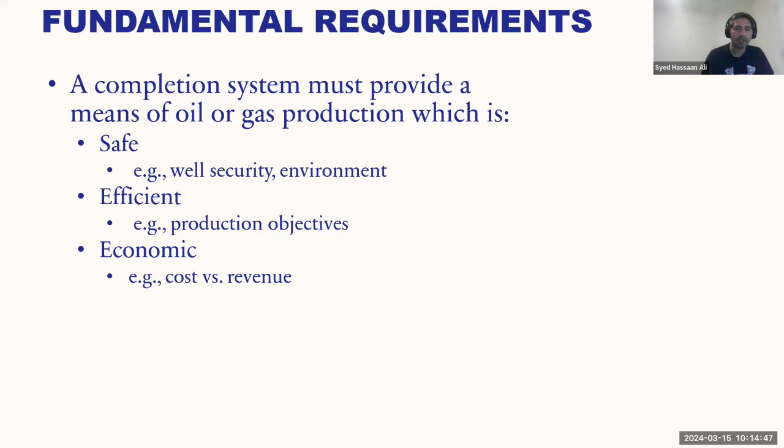Completions: history and evolution. It's not a very new technology, but it has evolved dramatically in the last century.

The first wells were dug in the Caspian Sea—these were shallow wells, and that's where the first completion was deployed. But the major advancements actually happened in the early 1900s, where the first gas lift devices were invented.

The first dual completion happened. The ESP was invented in 1926, and all of these technologies resulted in us producing more effectively and efficiently from these wells.

We could now dig deeper. We could now complete these wells deeper, and with the advent of artificial lift technologies in completion design, these wells that were drilled could produce for a longer period of time.

So it was more efficient and economical to produce from those wells which were previously deemed uneconomical.

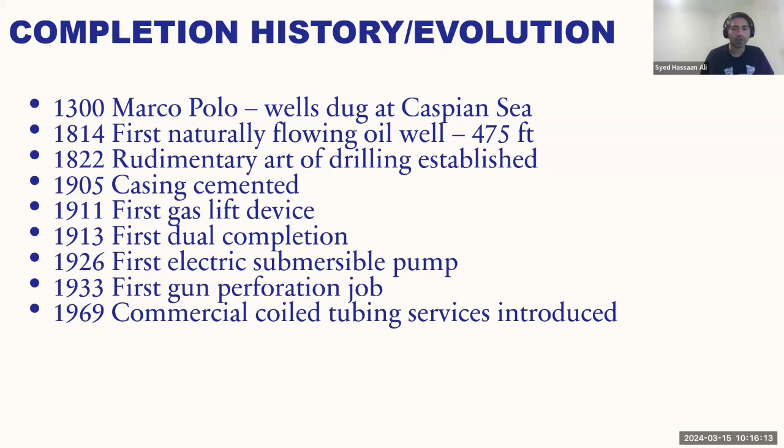And then finally in 1969, when commercial coil tubing services were introduced, that's where a huge boom in the oil and gas industry was experienced.

So the factors affecting well performance—there are three things that actually affect well performance.

The first and foremost is the reservoir boundary. This is usually estimated during the appraisal stage, in which appraisal wells are drilled and geoseismic studies are conducted, so that you can determine the reservoir boundary—how deep the reservoir is, how extended it is, and what its different boundaries are. Reservoir properties such as how much oil, gas, or water is present can also be estimated.

How much H2S is downhole can be measured, but the only thing that can actually be controlled is your completion design. So since completion is the only area which can be controlled, there is an obvious need for the completion design and installation process to be carefully conducted.

This can be explained through this flow versus time graph. This is a very simple graph, but most oil wells or reservoirs will follow this kind of pattern, where you have a very high flow rate initially when the well is drilled and completed and producing, just because there is so much reservoir pressure pushing that fluid to the surface.

But over time, as you start depleting your reservoir, the flow will go down, the pressure of the reservoir will go down, and now you have to make sure that your completion design is suitable for that entire time period, all the way from well completion to well abandonment.

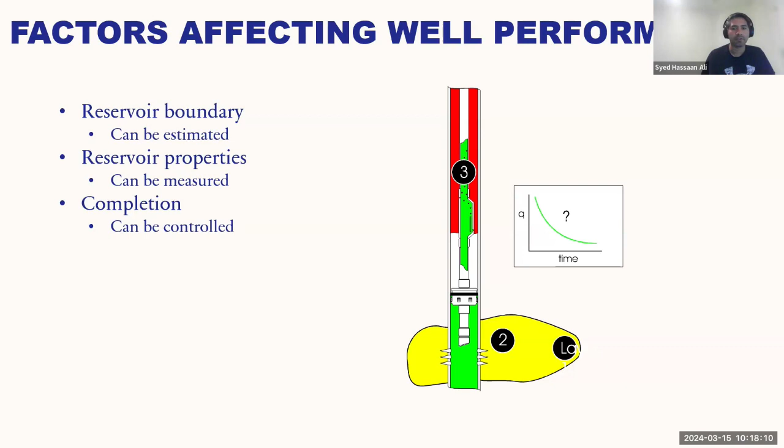In our previous lecture, we talked about the base rock and cap rock. I'm not going to go into a lot of detail, but just a quick recap: cap rock is essentially a non-permeable rock.

This is the rock that will prevent the migration of oil and gas into a reservoir which is higher than the cap rock. So effectively, what you want to do is have your completion deployed all the way through the cap rock into the base reservoir, or your producing reservoir.

And you want to make sure that all your perforations, your zones, are actually perforated in your base reservoir. And there are different types of completion designs.

The one on the left-hand side is a very simple straight vertical well, drilled with no multilaterals, no deviated wells, no horizontal well, just simple completions. This is how they used to do it early on, from the early 1900s all the way to the 1950s and 60s.

They would deploy a rig, drill straight down, and produce from the reservoir. That's it. But it had a lot of limitations, and one of the first is that once you have depleted that zone or the reservoir, you have to drill more wells just to produce from the reservoir.

Now the technology has evolved to a point where you don't have to drill vertically. You can drill what we call a horizontal well. Effectively, you come straight down, then reach a kickoff point where you start drilling horizontally. Now you can drill one well through the entire length of the reservoir and deplete it completely—not completely, but to a large extent.

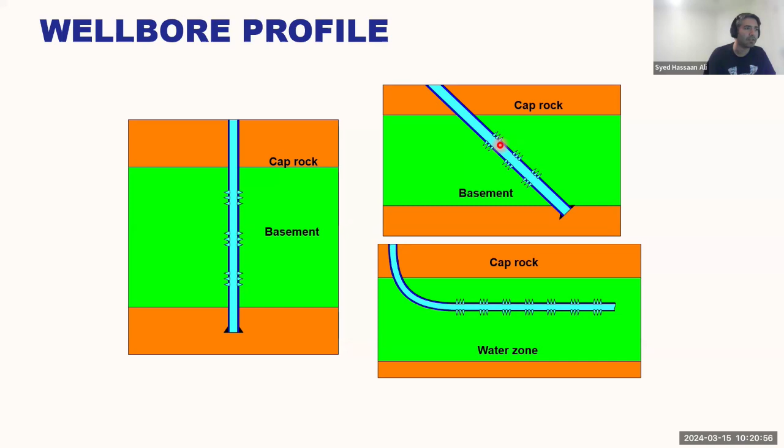There are a couple of functions of completions, the first and foremost being protecting the casing. You have a casing and then a tubing. The casing is there while you are drilling the well, deployed until the well is completely drilled. Once that's done and you move to the completion stage, you deploy the tubing.

Effectively, with your whole completion design, you are trying to make sure you protect your casing. Number one, we don't want it to erode, because behind the casing there is cement acting as a barrier between the formation and the casing. You don't want to erode your casing, because it can result in a lot of other problems.

You also don't want it to be corroded. A lot of times we use a lower grade of steel in the casing, so we want to make sure there's no contact of the formation fluid with the casing, because it can result in corrosion and erosion.

Tubing string removal is the second most important part of completion—you want to remove your tubing string whenever you have a requirement for a workover. Sometimes you do workovers for additional perforations, to clean the well, for snubbing, coil tubing operations, milling operations, or to remove artificial lift. So you want your tubing string design to be removable and modular, suited to replacement or workover—plus safety and contingency.

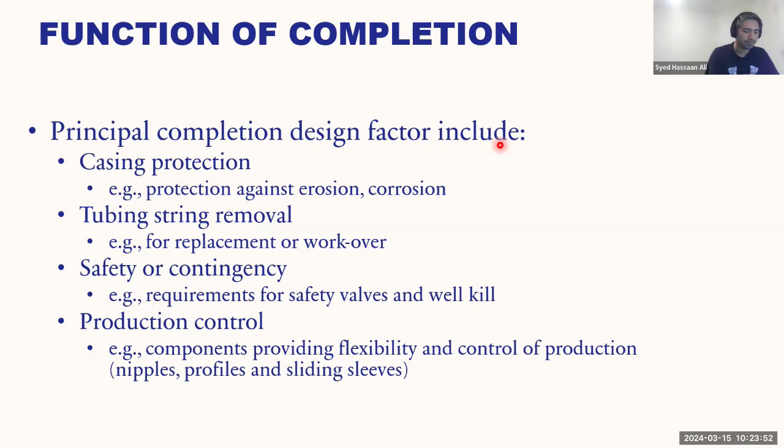There are two types of basic completions. One is called open hole completion and one is called cased hole completion.

The difference is simple. In open hole completion, you drill the well, deploy your casing, and then cement it. Below the casing, there is just a big open hole, which is not secured by any liner or production casing. It's just open.

What results is that it can actually result in an unimpeded flow into the borehole from the reservoir, but it can also result in other complexities. For example, your hole can actually cave in and it will reduce your production.

So gravel pack completions, although not very common, are still kicking around. You have to be cognizant that there is something called a gravel pack completion.

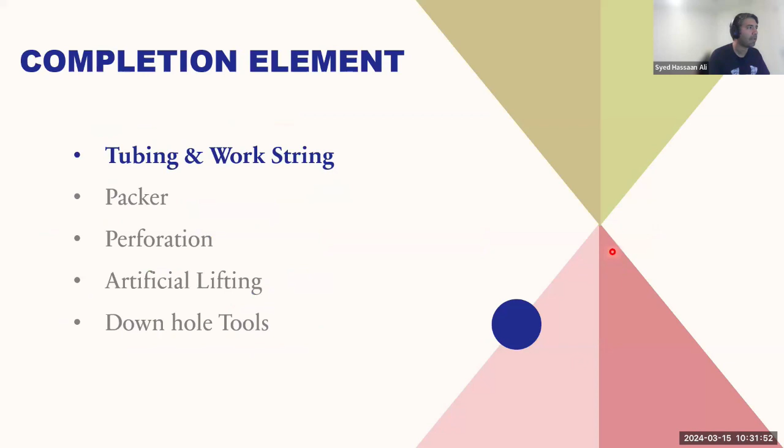So completion elements - one of the first completion elements we talk about quite a lot is your tubing and your drill pipe. Tubing is just a piece of tube made from specialty alloys. What you want to do is select the grade of the alloy to match the reservoir characteristics and the depth of the well, because alloys with a higher grade, higher yield strength, and higher tensile strength can be deployed in deeper wells, while alloys with lower yield strength can be deployed in shallower wells.

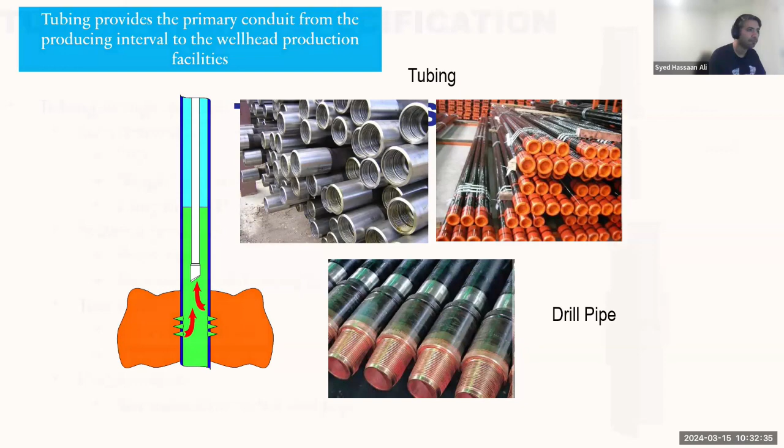Tubing string specifications: tubing generally provides the primary conduit from the producing interval to the wellhead production facilities - that means from your pay zone all the way to the top side. Therefore, proper selection, design, and installation of the tubing is very important as part of the completion system.

The size and dimensions of the tubing must be sized to enable efficient production. That means you want to maximize the size of the tubing. You don't want a very small tubing size because it will constrain your production due to the smaller ID of the tubing. So it should be selected to have efficient production.

The grade of the material - as I mentioned earlier, the string should be designed to prevent failure from tensile forces. There are a lot of forces in place, especially when you deploy a packer downhole: internal pressure, external pressure, tensile forces, compressive forces, and sometimes a combination of forces. So you want to make sure that, taking into account the corrosive nature of the wellbore environment, you select your material grade effectively.

And assembly of the components in a way that the string must be installed so that you can deploy all the components undamaged.

That means you can deploy your safety valve and your packer in a manner that will not let any damage happen to them, because they actually are there as a barrier. They're used as a primary barrier sometimes.

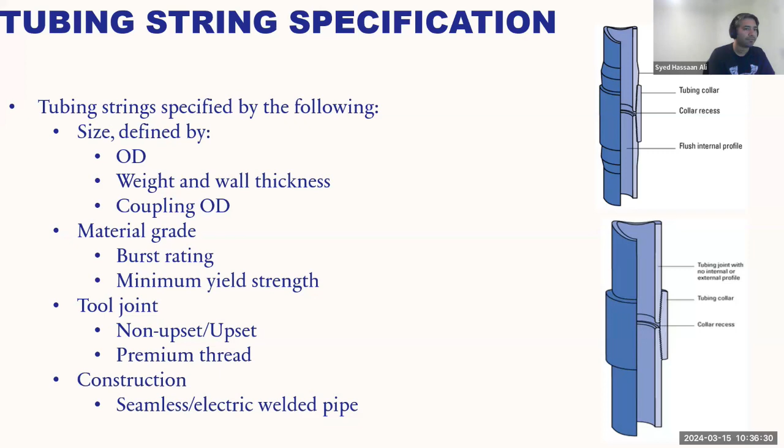So, string design factors - there are a few things I will briefly touch upon. We already talked about the production rate. The flow rate should be compatible with the flow area.

One other thing we take into account is that the pressure and tension the tubing will experience during the entire life cycle of the well should be less than 80% of the tubular yield strength. This is the rule of thumb - when selecting the tubing, you want to make sure that whatever pressures and tensile forces are going to be available downhole are accounted for. This is usually dependent on the length of the string; by the length of the string you will know the tensile forces the tubing will experience, and it should be less than 80% of the tubing's yield strength.

Also, burst and collapse - that means the internal pressure the tubing can experience and the external pressure should be less than what is specified in the tubing specifications. It should be compatible with the wellbore fluid, meaning compatible with H2S if present downhole, whatever the concentration, usually determined in parts per million (ppm), as well as the presence of paraffins.

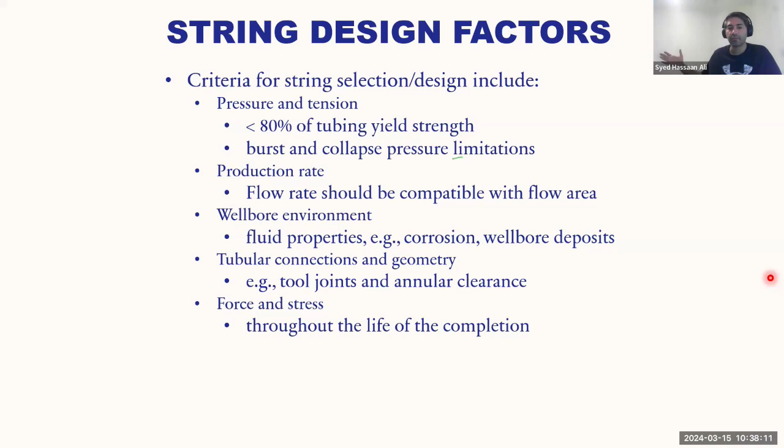And the last thing, which I'm iterating again, is the forces and stresses it will experience throughout the life cycle of the completion - that means we are talking about 20, 30, 40, 50 years in some cases.

Why is tubing specification important for fracking? It's very important because in fracking you are pumping a slurry at very high pressure from the surface to fracture the reservoir. So size and dimension are very important so that you can achieve the flow rates required to fracture that reservoir through that tubing.

The grade is important to prevent any failure from the tensile forces, because during fracking there can be a lot of tensile forces. Also the assembly needs to provide a pressure-tight seal so that you do not have uncontrolled exposure of the wellbore fluids.

The example on the screen shows that for a particular OD and weight of tubing, you get the collapse resistance - that means your external pressure resistance and internal yield strength - and also what the wall thickness and drift diameter are. The drift diameter is another important factor, effectively the maximum OD of any tool that can pass through the tubing. In this case, for a 2.875-inch tubing with a weight of 8.7 pounds per foot, the effective drift diameter is 2.165 inches.

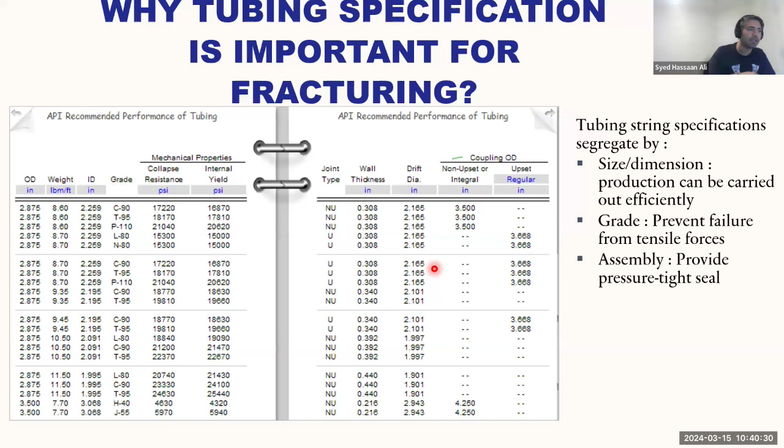What might happen to the tubing during fracking? During fracking, there are multitudes of forces experienced by the tubing. If there is a packer deployed downhole, you can get compressive as well as tensile forces experienced by the tubing. So you have to anticipate that when selecting the grade and OD of the tubing.

There are 4 different principles that can cause the change of length of the tubing. The first and foremost is the piston effect, the second is buckling, then it's accompanied by ballooning and the temperature effect. We are going to talk about them in the next slide.

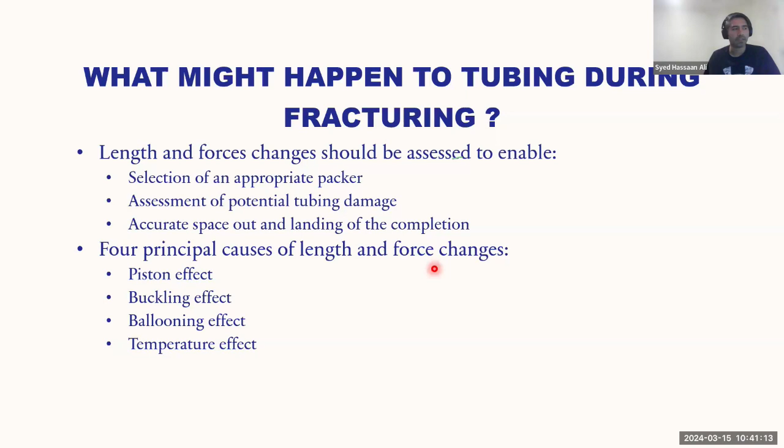Pressure buckling happens when there is an unequal force distribution caused by a large internal pressure, tubing pressure differential. That means you have higher pressure at the top of the tubing and lower internal pressure at the bottom of the tubing. It can result in pressure buckling.

This is actually aggravated if there are minor changes in the wall thickness of this tubing from top to bottom, since the tubing runs all the way from the topside to the bottom of the completion. This can amplify your pressure buckling. Minor variations in the wall thickness of the tubular goods will initiate pressure buckling. Pressure buckling only occurs when there is a high internal differential tubing pressure and contributes very little to the tubing length contraction.

The tubing length contraction will only happen if there is a packer available downhole. The packer acts like an anchor, so it will not let your tubing expand or contract. That is very important when doing hydraulic fracking, whether there is a packer downhole or not.

In ballooning, what effectively happens is that you have a high pressure zone at the top and a lower pressure zone at the bottom. If there is a packer downhole, it will shorten the string and increase the tension of the packer. In reverse ballooning, there is a high pressure zone at the outside of the tubing and a low pressure zone at the top section. So what effectively happens is that it tries to lengthen the string and reduce the tension.

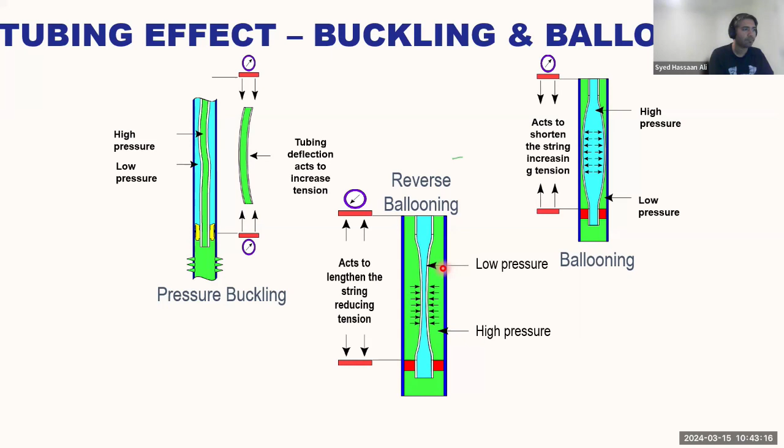The piston effect is effectively a force that is up and down at the end of the tubing, pushing the tubing up and down. It happens during thermal cycles. The tubing will contract when you are pushing a cold fluid, like a kill fluid, through it, and it will expand when pushing a hot fluid, such as a perforating or fracking fluid. So if the tubing is restrained from moving, a tensile force will be applied to the packer.

When I say the tubing is restrained from moving, that means there is a packer available downhole, and in that case there will be a tensile force. If the average temperature of the tubing is increased, meaning you are pumping a hot fluid through it, then the tubing will elongate if it is free to move. If there is a packer downhole, the tubing is restrained, and in that case there will be a compressive force applied to the packer.

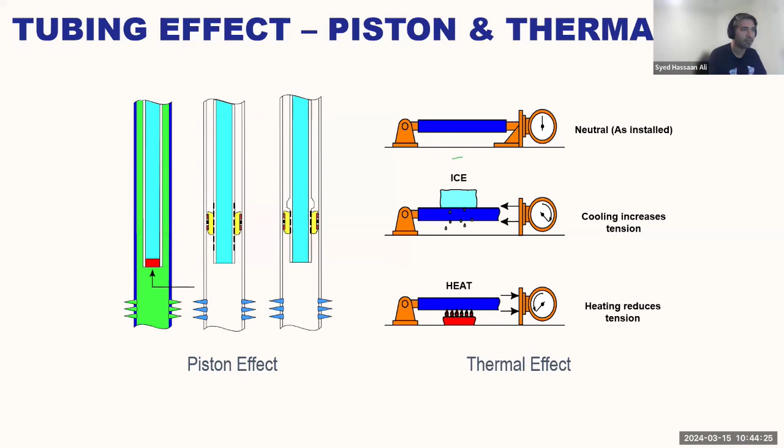I've been talking about packer quite a lot. Let's look into what packer actually is. A packer is a subsurface tool that provides a seal between the tubing and casing, thus preventing any movement of fluids past the sealing point. That means past the sealing point, there will be no fluid going into the annulus, which is the space between the casing and the tubing.

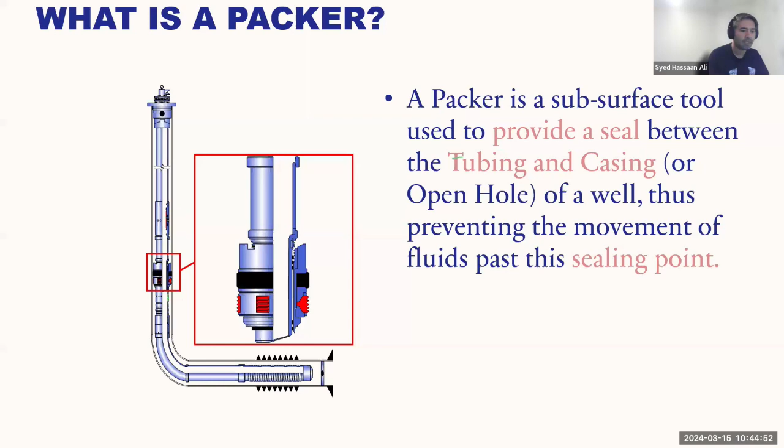Why are we running the packer? There are two main reasons why we are running packer. One is for production control, the other is for intervention. For production control, we are trying to protect the casing from the corrosive fluid, which we talked about in the previous slides.

It also results in keeping off the high formation pressure from the casing. Sometimes the casing cannot handle the high pressure of the formation, so we are trying to isolate the casing from that high pressure. Sometimes in multi-zonal completions, it's used to isolate production and for zonal isolation as well.

And then for intervention purposes, for well testing, for well repair, for stimulation. Sometimes we have to deploy completion when we are doing stimulation, such as fracking or perforating, as well as for sand control, because if you have a lot of sand going into the annulus and the packer is not present, it can erode your casing.

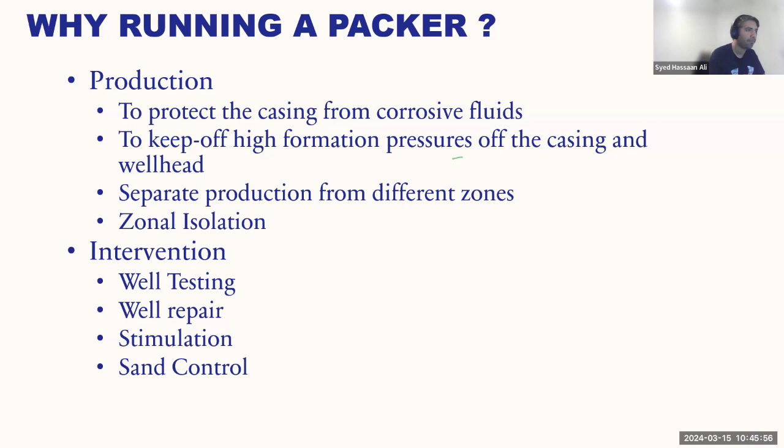These are different types of packers. They can get very complicated very quickly, but some of the basic packer components are the mandrel, which is effectively the entire packer body. There are two main things: what is called slips. Slips are like very hardened teeth that will anchor themselves into the casing, just to make sure that the packer doesn't move once it's set.

The second most important element is what we call the packer element. This is made up of elastomers, and effectively once you set your packer, this element will expand and provide the sealing between the casing and the tubing. You also have slips at the top of the packer, just to anchor it again to the casing. There are different ways in which you can set the packer.

There is hydraulic setting. It can be set through the slick line. It can also be set through the electric line, or E-line.

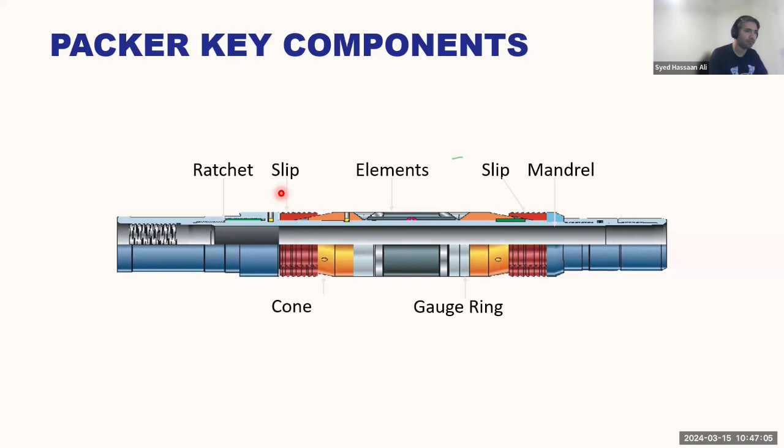Evolution of perforations. Perforations is a topic that is not very commonly discussed out there, but it is very important when we are completing the wells and producing the wells, because it will actually determine how effectively you are drawing down your reservoir.

This is just a quick evolution of the perforations. Initially in the 1800s, they were just deploying explosives downhole, just detonating it and fracturing the reservoir, just beating the hell out of it. We have gone away from it, we don't do it anymore.

In the 1900s, they were mechanically puncturing the tubing. There was this tool that would go down and puncture the well. It is not very effective because it can actually just puncture the casing. But as perforation evolved, what happens now is that you deploy what we call a perforating gun downhole. This gun has explosive charges or shaped charges.

And they will detonate and create these channels inside the reservoir, so that your oil and gas can flow into the perforations, into your tubing, and now you can produce.

Now we have gone to a point where we are actually perforating 10 to 30 feet into the reservoir. Initially, it was 5 feet or less when the perforating technology first started, but now with advancements we can perforate to a greater distance.

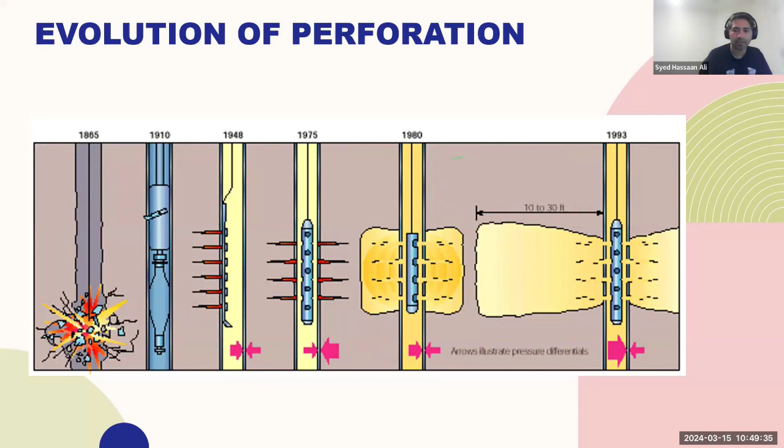Perforating gun components: the principal components of any perforating gun or system include a charge carrier, primer and detonator cord, charge liner, explosive charge, charge case, and a gun body. Once the detonator cord detonates the charge, it produces a string of very high pressure fluid traveling at a very high velocity that will puncture the casing into the cement, into the reservoir, into the formation.

The principal components of any perforating gun system include the charge carrier, where your gun components are placed and connected, and your detonators. The detonators are used to initiate the ballistic sequence at the time of perforation.

Safety systems are there to allow perforating guns to be assembled and deployed safely, and are typically attached to a detonator. This is just a very simplistic example of the perforating gun.

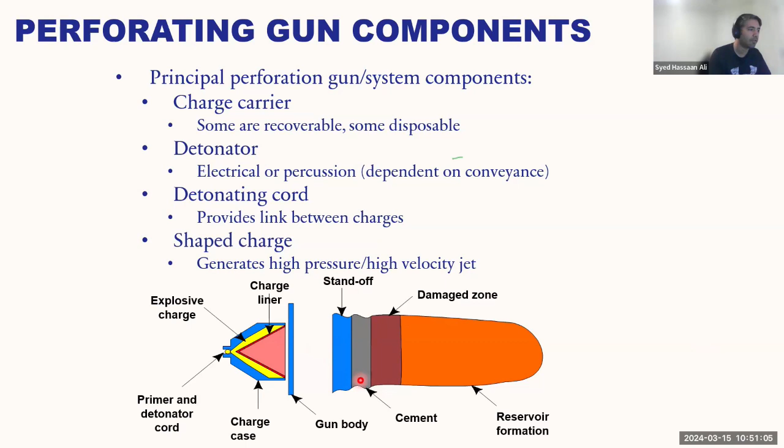This is just an example of different steps of perforation. You can see the time is over here: 0 seconds to 4, 10, and 17 microseconds. So it's a very, very quick process.

Effectively, what happens is that your detonator cord will prime and detonate your charge. The detonated charge at the tip will start deforming, and the jet tip will perforate your casing into the cement, into the reservoir.

It's a very high jet velocity, 7,000 meters per second, very high pressure because it's a sonic wave, so millions of PSI, at a very low temperature, and the gaseous jet does the work.

So effectively, you are not blowing up the well. The explosive, in a shaped charge form in a conical shape, is focusing on a very small area in a very short period of time to create that shock wave and make that perforation.

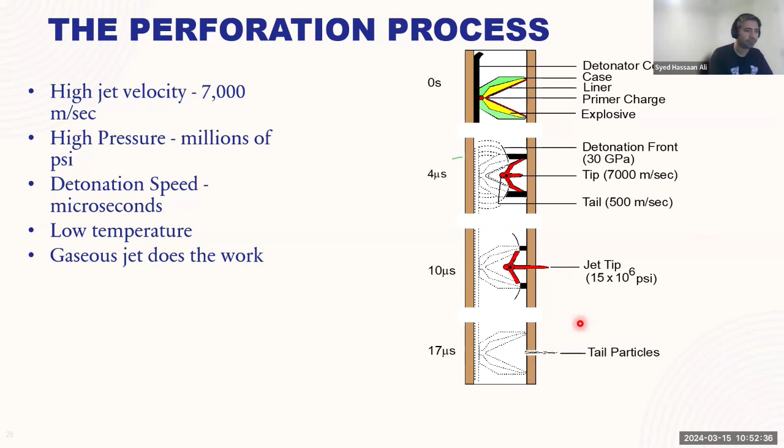This is just an example of perforated casing. Effectively, an extremely high pressure jet in a very short period of time will create that perforation. Then the perforation debris will flow back into the reservoir and flow through the tubing, and you will have a clean, stable perforation tunnel, ensuring that your oil and gas is flowing smoothly without any constriction.

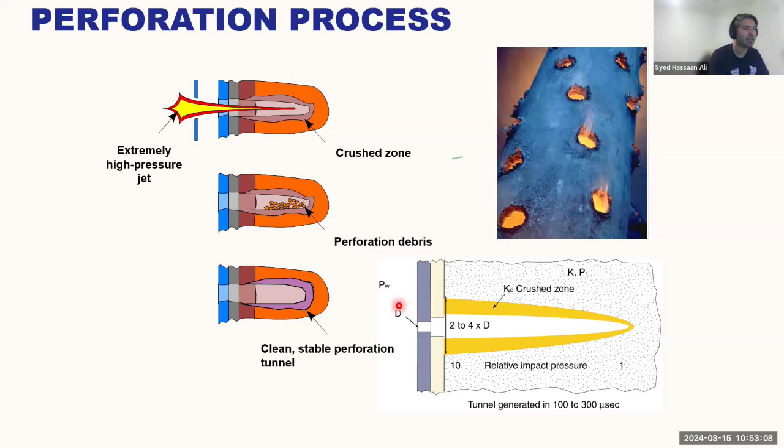There are three types of perforation pressures, or three types of bottom hole pressure conditions that generally occur during perforation: balanced, underbalanced, and overbalanced.

When perforating while the pressure is balanced, that means your bottom hole pressure in the wellbore is the same as your reservoir pressure. If it is equal, it is generally not advised to do perforations because it will not offer any benefits.

In case of overbalanced perforation, your wellbore fluid pressure is greater than your reservoir pressure, perforating with kill weight fluid volume in the wellbore. After the perforation is created, the pressure within the wellbore acts to compact the perforating cuttings in that area, and it can impede your flow.

The best condition in which you should do a perforation is what we call underbalanced condition, in which your bottom hole pressure in the wellbore is less than your reservoir pressure. That means once you do the perforations, the formation fluid will go into the tubing, and you can produce it without much effort. It also reduces the likelihood of near wellbore damage.

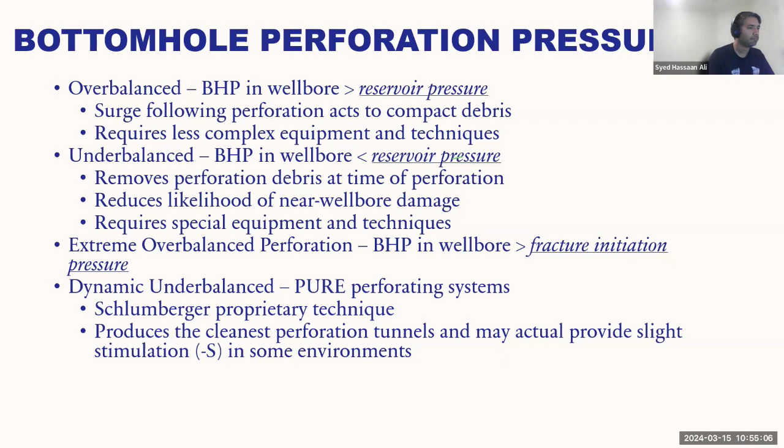General production concept: there are two types of wells in terms of production. There are wells that are flowing naturally, and wells that require artificial lift. Only 6% of the wells in the world are actually flowing naturally, meaning 94% need some sort of artificial lift system to push the formation fluid all the way to the surface.

When the well fluid is flowing naturally, your P naught is less than your PWF. PWF is your formation pressure, and P naught is your bottom hole pressure. That means in the case of a well flowing naturally, your wellbore pressure is less than the formation pressure, meaning the formation pressure is more than the wellbore pressure.

But in case your wellbore pressure becomes greater than the formation pressure, then you need to deploy an artificial lift system, because now the well cannot flow naturally.

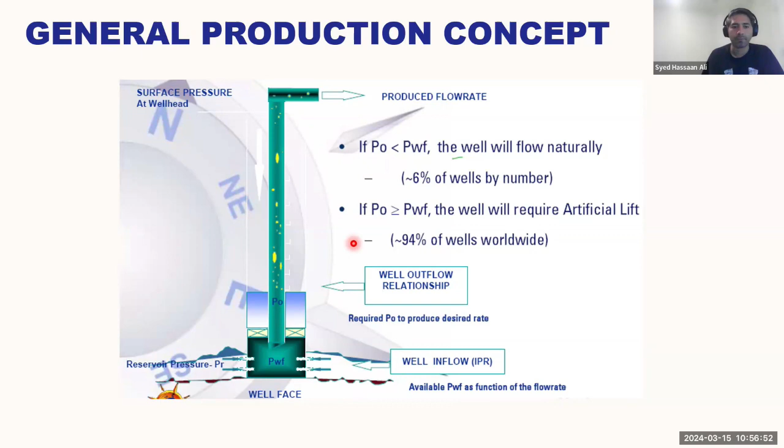Although artificial lift systems may be installed later in the life of the reservoir, there is a clear benefit in preparing for the artificial lift system when preparing for the construction of the well. That means you need to plan ahead for this. Relatively small modifications to the well configuration can provide the flexibility and enhancements which benefit the long-term production capability and capacity of the well. So these are all the factors that need to be considered when you are constructing the well, when you are selecting and designing the artificial lift system for the well.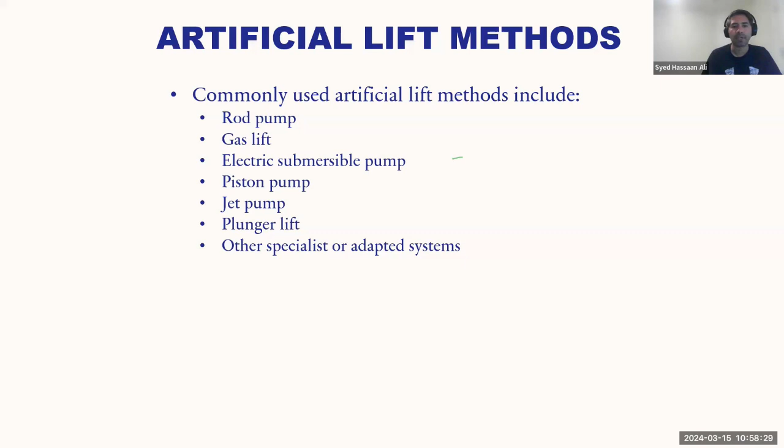So rod pump is perhaps one of the most common types of artificial lift system. You have seen it around the world. It's kind of an icon of the oil field, the oil patch. You have your prime mover, which can be a gas engine or an electric motor, effectively running a reciprocating pump. This is what we call a walking beam. This is the stuffing box and polished rod. The stuffing box provides sealing so that your wellbore fluid does not get exposed to the surface. And then your production valves are usually at a T so that you can actually produce it and get your production fluid to a separation facility.

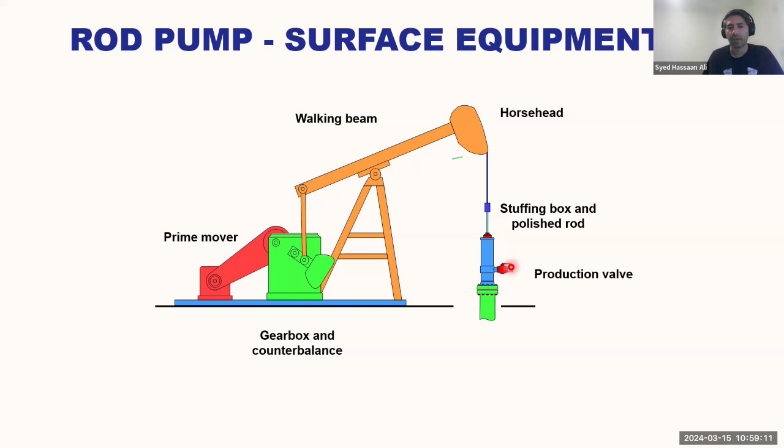So that was the surface system. That rod pump or beam pump is actually connected to what we call a rod pump downhole. And rod pumps account for almost 60% of the onshore artificial lift completions. It's a very economical method of producing oil and gas, and it is deployed very widely around the world.

It does have some limitations. Although it's very economical, it is maintenance intensive. That means you have to maintain all the surface infrastructure - that rod pump has a gearbox, it has a motor, sometimes what we call an engine as a prime mover. So it is maintenance intensive, and it is mostly deployed in vertical wellbores. If it is a horizontal wellbore, then it is not a very suitable method of artificial lift. So it has some deployment efficiencies and limitations as well.

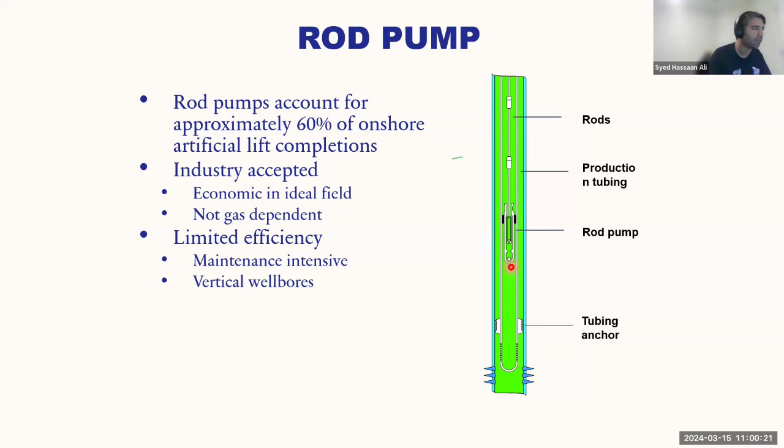Gas lift is another method in which a gas lift valve and a mandrel are deployed as a part of your tubing. Effectively, what happens is that you push high pressure gas through the annulus, and it goes through the gas lift valve. It will commingle with the fluid, mix with the fluid, lighten the fluid column, and once it starts lightening up that fluid column, it will push it all the way to the surface.

It's a very, very reliable method of completion. It is economical. It is deployed onshore and offshore, just because it's so reliable. But that would mean that you need to have a surface compressor on the top side to inject that high pressure gas. It is wireline serviceable, meaning you don't have to actually pull the tubing. So it is very economical to do a workover on a gas lifted well. It has fewer mechanical components, meaning it is reliable, with very few rotating parts, and it is very tolerant to sand and debris.

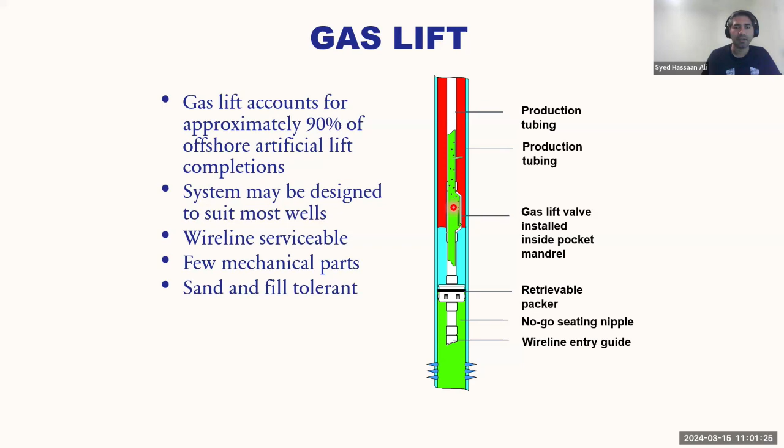The other last method of artificial lift is the ESP, or electrical submersible pump. Effectively, it's a motor with a pump downhole, completely submerged in the formation fluid, run through an electrical motor which is also downhole. The electrical motor is connected through a cable running all the way to the surface, clamped along the length of the tubing. Your motor will run the pump, and the pump will push the fluid all the way to the surface.

It is also a very reliable method, now widely deployed offshore as well, just because it can produce higher flow rates. It does accompany higher installation and operating cost. In terms of operating cost, since it's run by electricity, you need to account for that additional electricity consumption when designing your surface facilities.

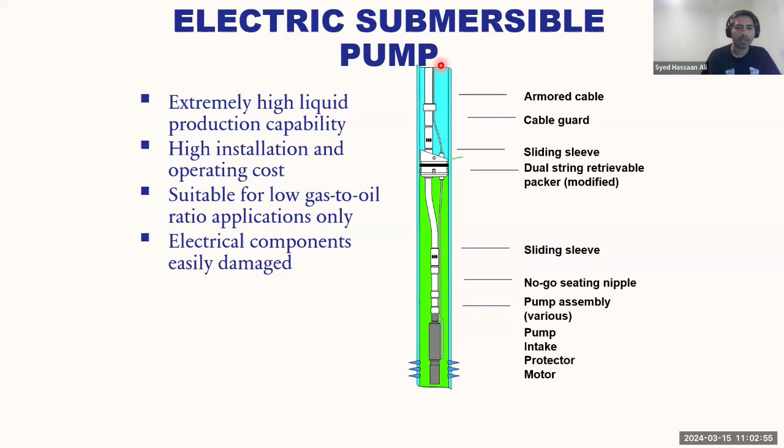And it is suitable for low gas-to-oil ratio wells only. If there is a high gas-to-oil ratio well, then the more suitable method is either rod pump or gas lift. Although it's becoming more and more common, these pumps are becoming more and more reliable. Initially, when they were deployed, there were reliability issues, because the electrical components could get damaged.

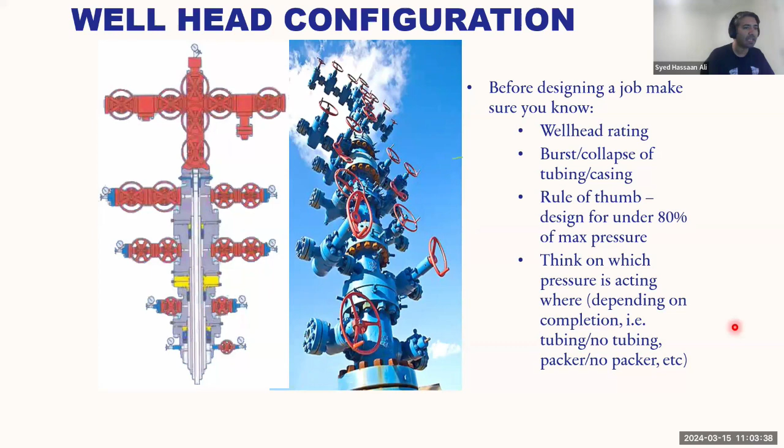Last but not least, wellhead configurations. Wellhead - some areas call it a Christmas tree, some people call it a wellhead. Effectively, your wellhead is anchoring; it has your casing hangers, your tubing hangers, all the flow control valves - your master valves, your wing valves, your swab valves - and it is containing all that pressure within this wellhead configuration. So this is the last piece of completion you should put a very keen eye on and ensure that it is selected in a proper manner.

I think that's pretty much it.

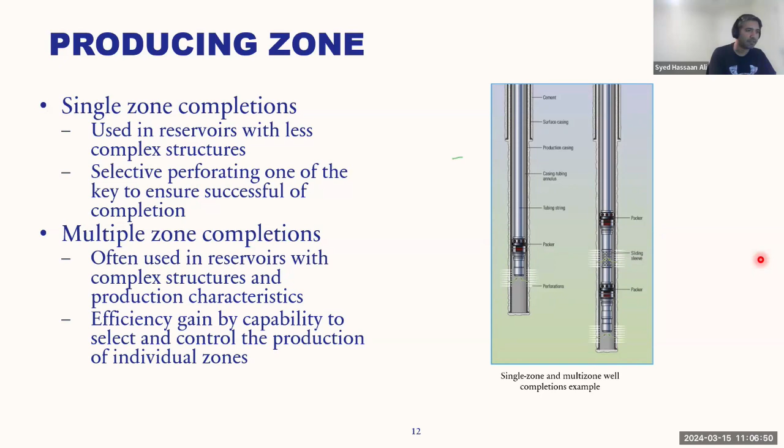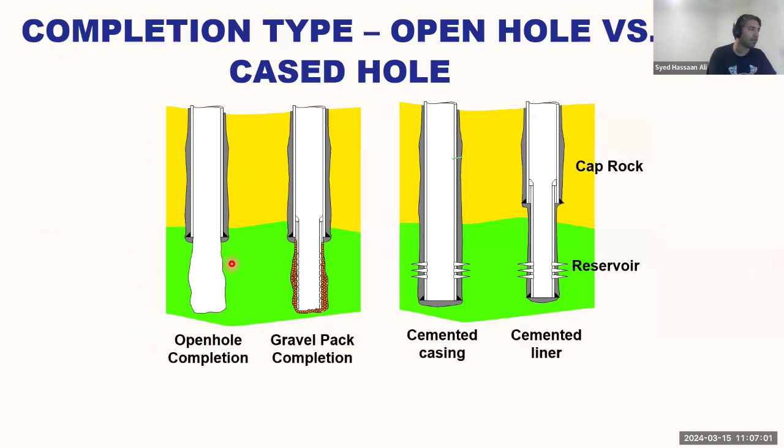So that is correct. Open hole completion is this one, in which you don't have a cemented casing at the bottom. And then liner completion is like a cemented, what we call a cased hole completion, but with a liner at the bottom. So yeah, that is correct.

And Caleb, last time you mentioned deviated wells. Can we use the types of completion with deviated wells? 100%, you can use these completions with deviated wells, especially the completions that include packers, yes.

And where's the perforated? Did you explain the perforated? Yeah, so the perforations are usually below the packer. There you go, as you can see over here.

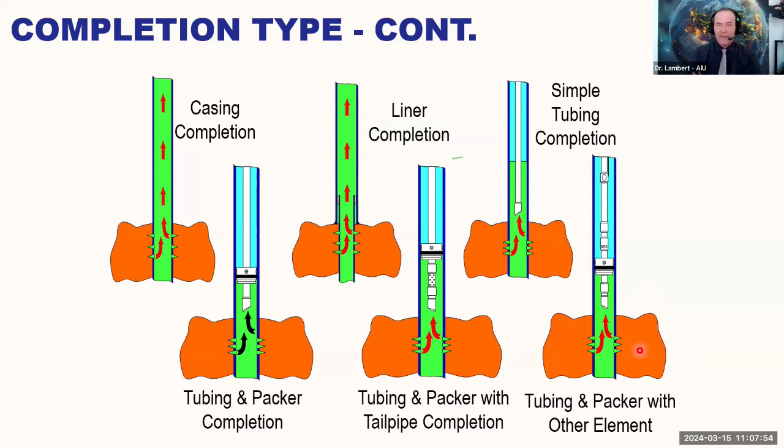Leonard says, I would like to know the requirements for carrying out this type of completion, and on what type of soil is it recommended? It depends on multiple factors. One of the first things I can tell you, this type of completion is usually used more in areas where you have corrosive well fluid. So you are trying to isolate your casing from that corrosive well fluid. And if you have a very high formation pressure...

Because casing, due to its larger surface area, has a lower specification in terms of internal pressure, sometimes you don't want to expose your casing to high pressure. So in that case, you sometimes deploy a packer to isolate that pressure, and then you produce through the tubing.